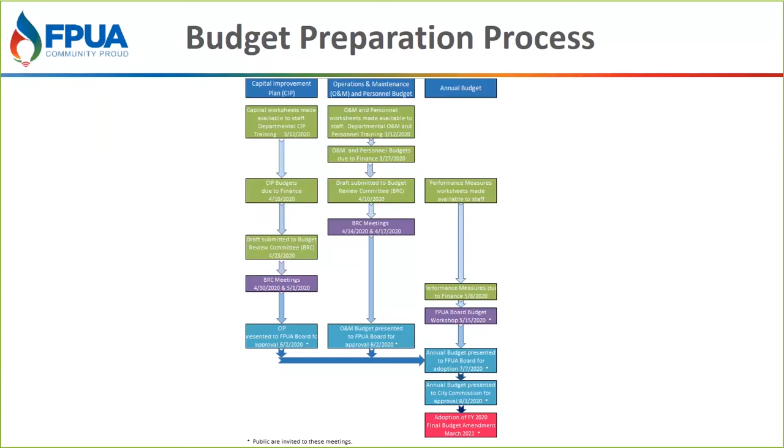Today, we are having our virtual workshop to explain what staff has put together in their budgets for the next fiscal year. After today's meeting, we will make some necessary changes, and we will present the individual O&M and capital improvement plans to the board.

What is being presented today is, as Mr. Tompak said, a draft. We are looking for your input so that we can make the required changes prior to presenting the final version for the board for approval.

As Mr. Tompak said, the O&M budgets are relatively flat, up just about 0.8% in the categories of salaries, employee insurance, and some other categories of professional fees, offset again by the purchases for resale.

The rate-funded budgets exclude any non-cash expense items: depreciation, amortization, and accretion, and the contingency is not included here.

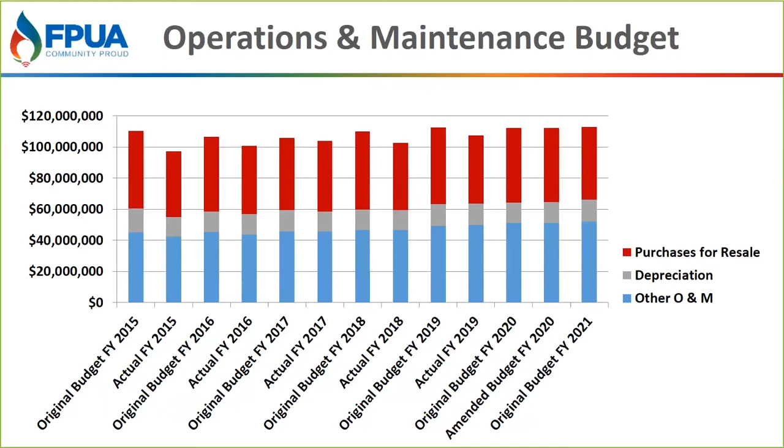This is all that I have to present on the overall look at the budget.

First off, water distribution. This project is for main services and valve replacements, budgeted at $556,000. This is the code used to handle any main breaks and other emergencies. Asphalt usually eats up a pretty good amount of that money as well, and if we have to call in the unit price contractor, this would be the funding source for that as well.

So if you look at the pictures I'm showing here, this is a break that happened a few months back on Delaware Avenue. We were lucky enough, if you can call a main break lucky, that this was underneath the sidewalk and not underneath the asphalt. So the overall cost for this repair was around $17,000. If it had been under the asphalt, it would have been at least twice that much.

Also in this picture, you can see the cast iron pipe and its condition. I really wish I could say this was an isolated area and that there wasn't miles and miles of this old cast iron pipe in our system, but that's simply not the fact. Most of the old parts of our system are this cast iron pipe.

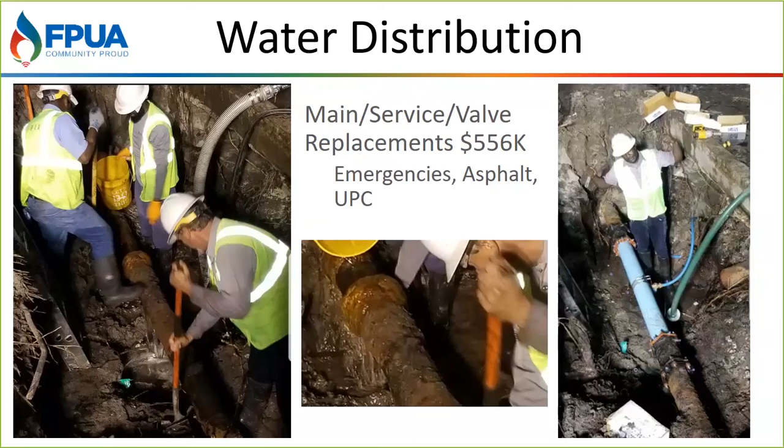Just to give you some statistics, the Water Distribution Department responded to over 135 different breaks this last year. Now that's not all big, massive breaks in the road. A lot of times it's a service saddle or service line that fails, and it may only be a few thousand dollars to repair that. But then there are others, such as the big break we had over on Georgia Avenue last year that cost well over $50,000 to repair.

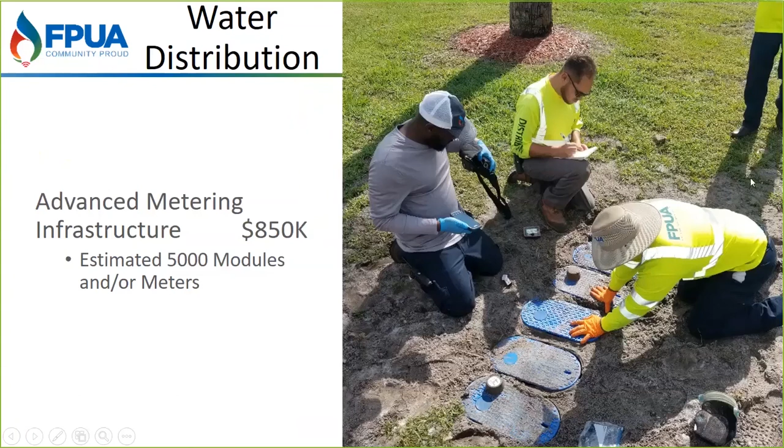Another big ticket item we have in the Water Distribution Department is the deployment of AMI at $850,000. We are estimating an installation of about 5,000 modules this next year. It's a very aggressive schedule. And in conjunction with that, when the guys are out there installing them, if the water meters are close to the end of their useful life, they'll go ahead and change those out at the same time as well.

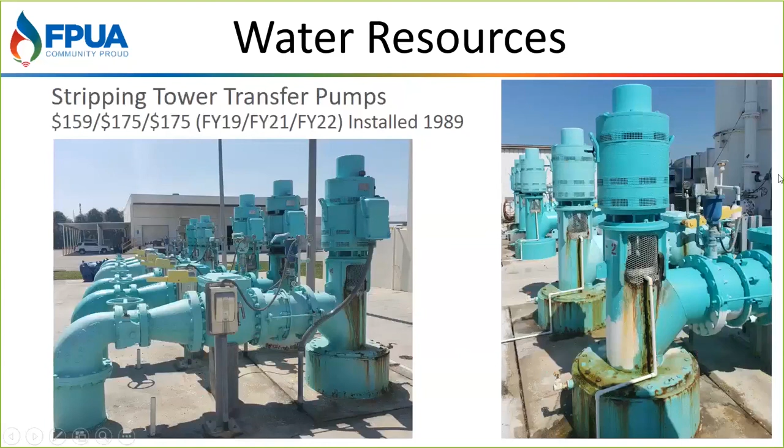Moving on to the stripping tower transfer pumps. There are 6 of these that were installed in 1989. 2 of them were replaced back last fiscal year. This fiscal year there were none scheduled, but going forward for the next 2 fiscal years, we are planning on changing the last 4 out, 2 per year at $175,000 per.

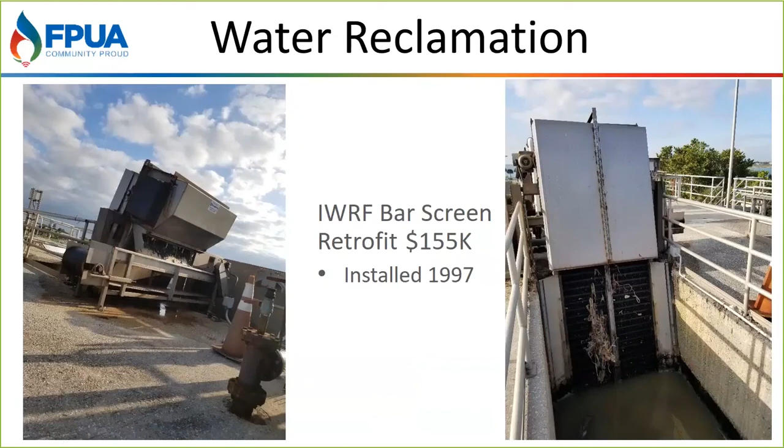Moving over to wastewater, this is the IWRF bar screen retrofit at $155,000. This particular machine was installed in 1997. This is our first line of defense for the wastewater plant. Without this particular piece of equipment, pretty much everything downstream would be fouled, and we would have some serious problems. You'd be very surprised at some of the items that this little machine gets out of the wastewater system. That's pretty much all I'll say about that.

Similar to the water distribution department, this project, mains, laterals, and R&R, is budgeted at $375,000 for the wastewater collection department. And again, this handles all the emergencies. Again, a lot of asphalt. A lot of funds are spent on asphalt for this particular code.

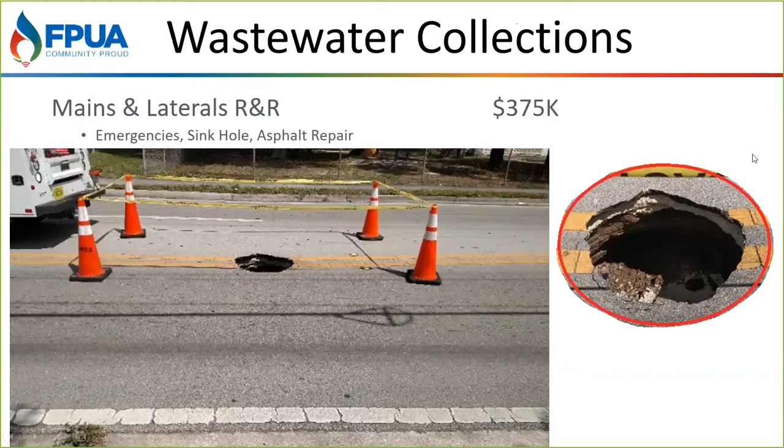The sinkhole you're looking at here is only about a foot, maybe 1.5 feet in diameter. It's obviously a much larger void underneath the asphalt before this actually pops up. Again, this is a relatively small one, but this one costs somewhere around $15,000. Sometimes these will be so big they could swallow a car, and $50,000 to fix a sinkhole is not uncommon. A sinkhole that pops up like this is something that the operations crews have to react to, and they usually deal with somewhere around a dozen of the reactive ones per year, as well as the other ones they're able to be a little more proactive with.

However, that makes water quality grants available to us. This year we have applied for a state water quality assistance grant to line the lowest part of our wastewater system, which would be the remainder of the pipelines over on South Beach. We are requesting $813,000 for that grant with an $813,000 match. We are keeping our fingers crossed for that.

All right, moving on to water and wastewater engineering. This is our customer base expansion program. This is budgeted at $525,000 for water and $200,000 for wastewater. There are 2 small neighborhoods that we're targeting this year.

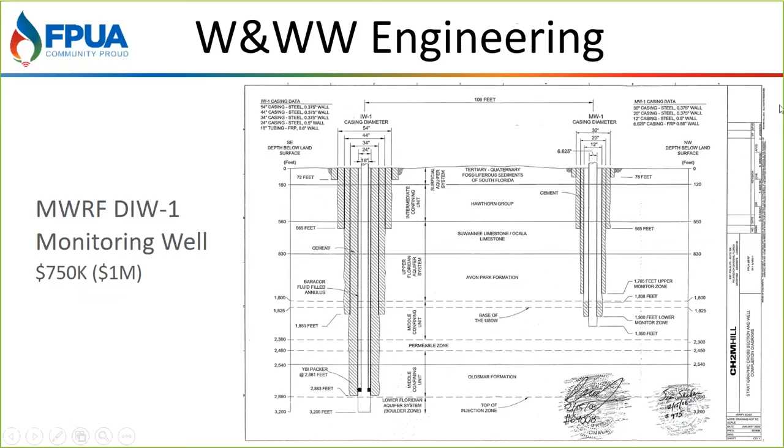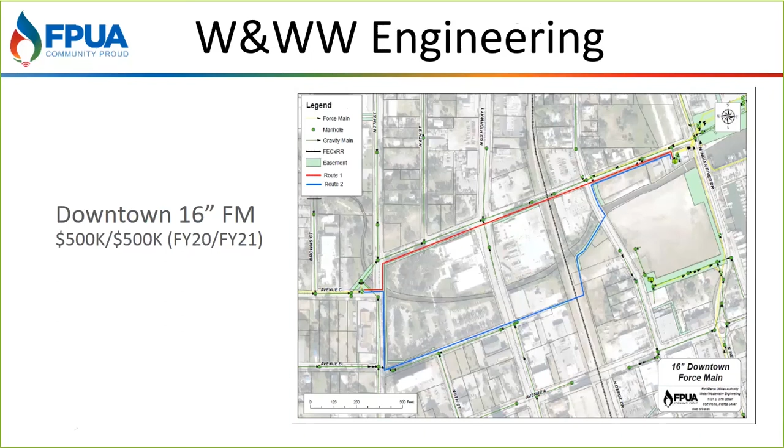And that is the end of my presentation. If there are any questions, I'll be happy to answer them.

Any board member have a question? Mr. Chairman, this is Linda Hudson. I have a couple of questions. It's on the customer base expansion of the 2 different neighborhoods. Is there an approximate cost for what it's going to be for the customer?

Well, the infrastructure in the streets, that will be funded by FPUA. That's part of our business model, and the business model is based on a 10% per year connection rate, which is the lowest connection rate we have ever seen, with examples such as a looping project where there was no advertising, no incentives, nothing of that nature. Even at a 10% connection rate per year, it's a good rate of return for us. So it's a good business decision for us to fund this ourselves.

From there, you have your typical costs for the meter and the installation, initiation of service. I think all of that together is somewhere around $900 on the water side, plus or minus. I don't have that number right in front of me. The wastewater side is a bit more expensive because you would have to install the grinder pump. You could have up to $9,000 as a pretty good estimate of what that would cost each one of the customers. That sounds like a tremendous amount, but it's right in line with installing a new septic system.

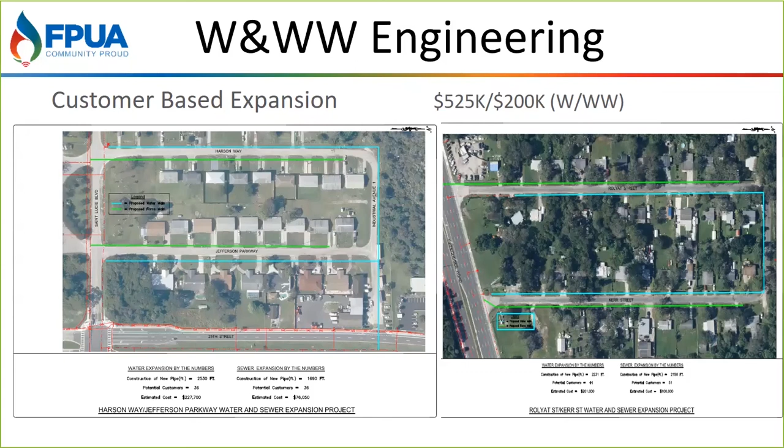A follow-up question on Lawnwood: I understand from the city side that Lawnwood told the city they're postponing their expansion until 2021, but are you still going ahead with this preparation? Yes, ma'am, absolutely. Our engineering group is working with them currently on sizing their on-site utilities, and we are moving forward as soon as this project is funded with starting the design on Frist Boulevard.

My last question is the MWRF, is that physically located out at the property where the ESC is? No, ma'am, that is on the same property as the TCEC, the Treasure Coast Energy Center. That's on the property we pre-purchased years ago for the new mainland water reclamation facility. All right, that's all my questions. Thank you.

Thank you. Any other board member? I have a couple concerns, let me address a few of them in line as I've written them.

The first one is all the cast iron, how much more cast iron pipe do we have in the ground? Yeah, we have a lot. Mr. Matthews, I can tell you all the old parts of the city are all cast iron. It is everywhere.

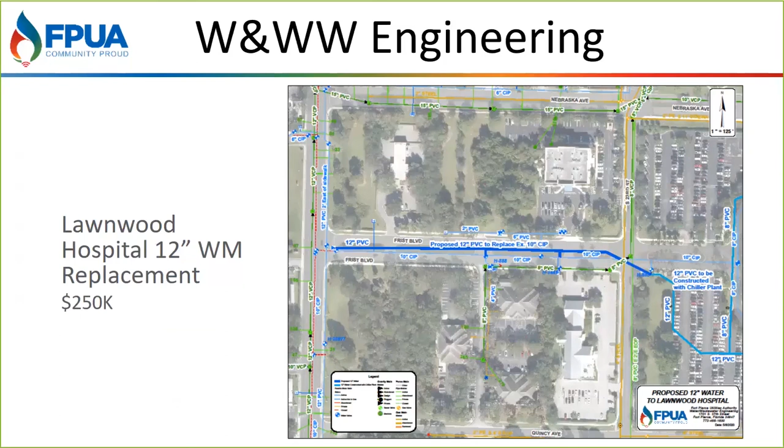Do we ever look at exploring grant assistance for projects like that? Yes, sir. I can tell you the lining project I showed you earlier, we're asking for assistance on that. There are very few grants for water. The grants are more tailored to protecting the environment on the wastewater side. The water grants themselves are very few and far between.

Neighborhoods that we hear about, but we don't necessarily say it's a problem here—I'm giving you an example, Orange Blossom Estates, looped around the stadium back in there. Do we have any major problems in that area? I would have to look back at our R&R priority list to tell you, but that is an older neighborhood, so the simple answer to your question is yes.

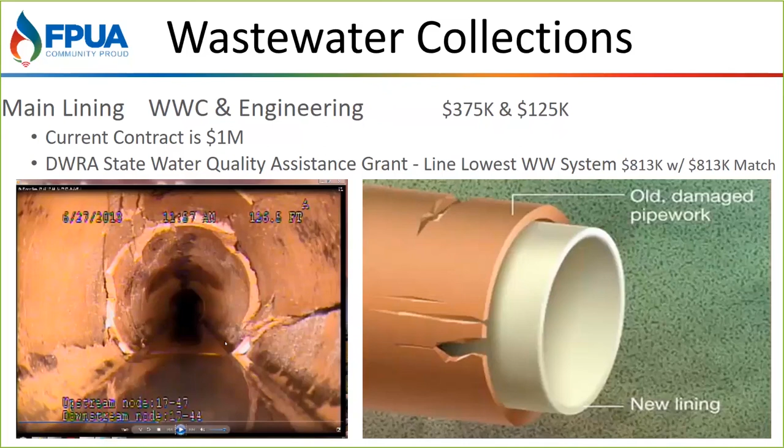Okay, all right. Mr. Tompeck, would you move us to the next project? Yes, thank you. Next presentation is by Paul Jakubczak on the electric and gas capital project overview.

Thank you, Mr. Tompeck, Mr. Chairman, members of the board. I'm happy to present some of the major capital projects we have for the gas and electric departments. The biggest thing we have on gas is how do we expand our 4,500 customer base to bring in more customers, but also bring in more revenue, which in turn will decrease costs to all customers as we move forward.

So we've identified three areas that we would like to expand to: Lakewood Park, Indian River Estates, and Harbor Branch. Lakewood Park is a large project to get out to. The estimated costs are about $14 million. There are 8,500 customers out there. We estimate that if we had a 40% take rate on all of those customers, we're looking at about a 17-year payback. So as you can see, it's more of an economics issue to get out to Lakewood Park. We will be continuing to look at ways to get out there.

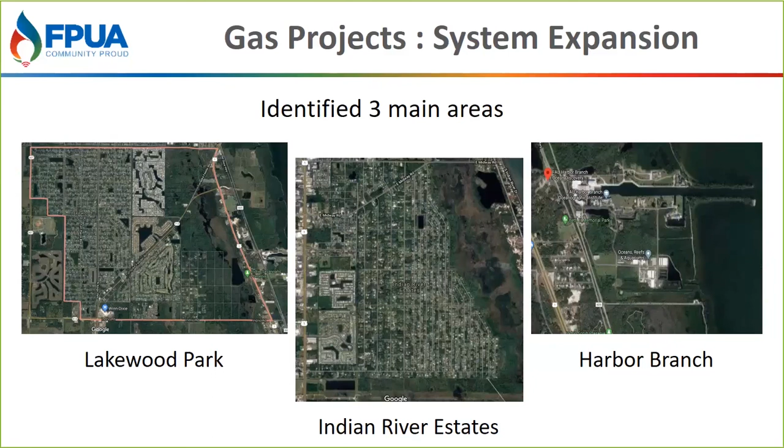Some of the challenges that we have, of course, is customer take rate. One of the things people don't really understand is the benefits of gas, and that's where we get into educating on the benefits. It's a clean-burning solution, especially for cooking and heating water. The other option it gives people is during hurricanes, if your power is out, you still have a way to cook and take warm showers. But the infrastructure costs are sometimes counterproductive to actually moving forward with that. We estimate the average cost for a customer with a gas water heater is around $25 to $35 per month. If you compare that to an electric water heater, you're probably looking at saving $20 to $30 a month just on water heating.

Some of the opportunities we're looking at to continue our expansion projects: installing in the right-of-ways, upsizing pipe as we go through. One of the projects we're working on right now is Kings Highway. As we move up, if we continue with this Harbor Branch project, it gets us closer to Lakewood Park and going down Indrio Road. The other thing we're going to investigate is joint trenching with the county and also with electric projects. The county is actually working on a project in Lakewood Park right now, possibly doing some drainage, maybe new sewer and water projects. We're going to look at getting into joint trenching with them.

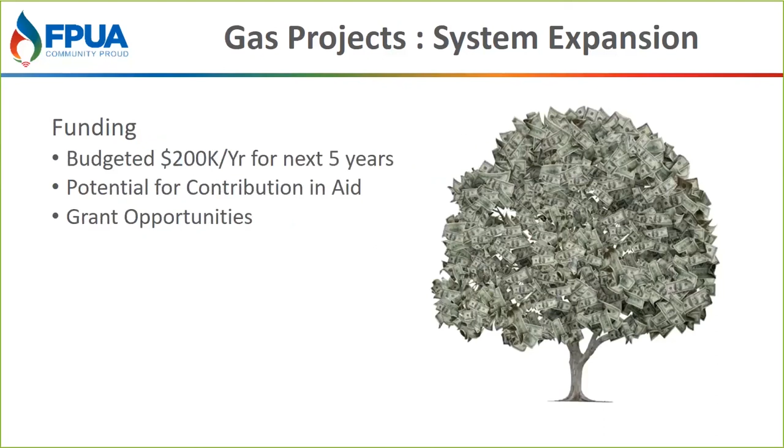Moving over to the electric side, we're going to talk a little bit about our transformer and 69 kV breaker projects. If you remember, a couple of years ago we approved our 2019 storm hardening and grid modernization plan. In that, we talked about changing 12 of the 69 kV oil-filled breakers in our system with what they call an SF6 vacuum bottle type installation. Right now, we're currently budgeting $180,000 per year for the next 4 years. We have already installed 3 of these switches this fiscal year, 2 at Causeway, 1 at Savannah. These are all going to be funded by rates and will improve the reliability of our electric grid.

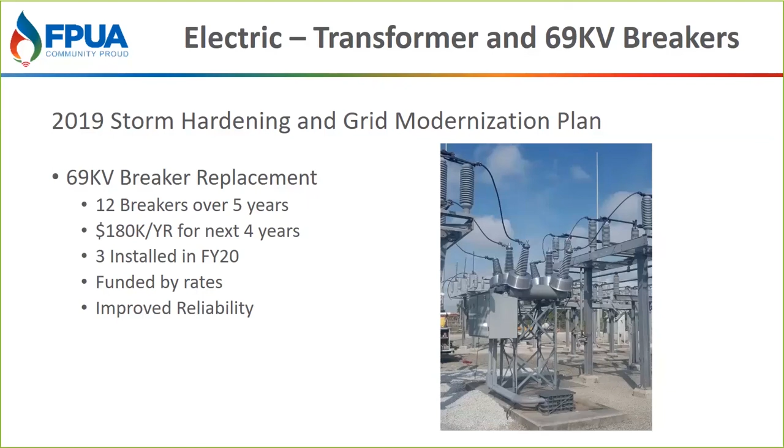Next slide. The second portion of our 2019 storm hardening and modernization plan I want to talk about is our 69 kV to 13.2 kV substation transformer replacements. As you remember, because of the cost of these, which is about $600,000 per unit installed, we're only budgeting to install 1 per year over the next 6 years. Right now, we're scheduling the first delivery of the transformer at Savannah in November with an immediate start of installation. All this is going to be funded by rates and will improve the reliability. Currently, the drawings for that Savannah transformer are 90% complete, and once they are 100% complete, they will start production of this unit to get it delivered to us by November.

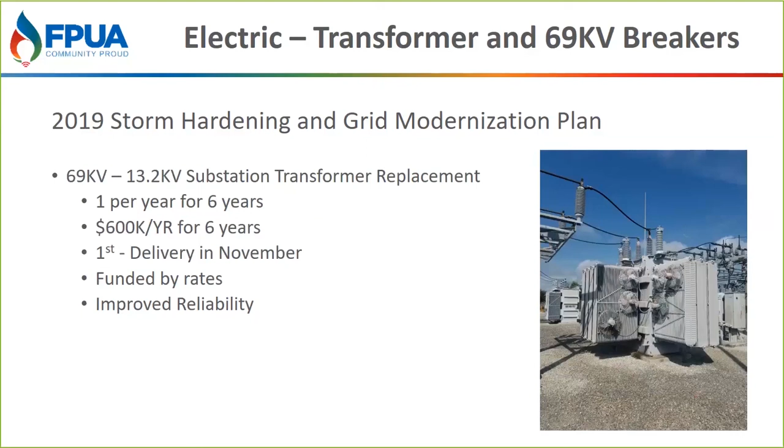The next project we want to talk about is our pole replacement project. Currently, we have 587 poles on the books scheduled to be replaced. Part of our requirement is that we test 20% of our system per year to make sure we're staying with the PSC and NESC requirements for pole integrity, to make sure they don't just fall down.

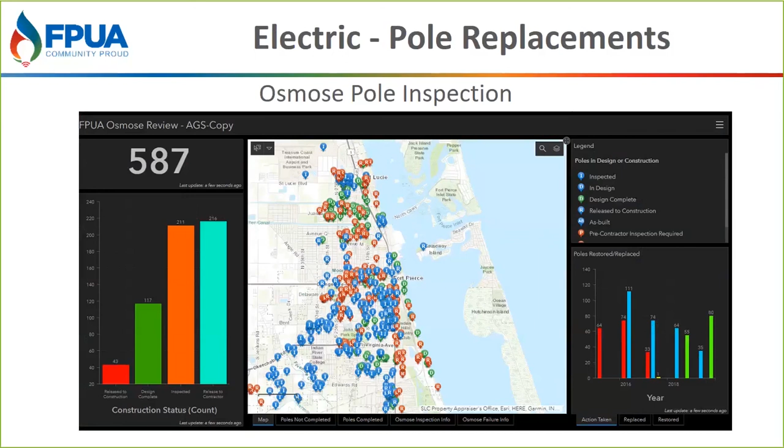Next slide. So what are we doing? We budget $350,000 per year, and we're going to do that for the next 5 years. We figure we'll be able to complete this 587 pole backlog that we have. Currently, we see roughly 100 or so poles added to this list per year, but we're seeing our numbers go down as we continually replace them.

As I mentioned, this is a PSC requirement that we go through and test and change out these poles. We also follow all the latest NESC guidelines for replacement. This is also part of our reliability improvements.

Recently, in the past 3 years, we've contracted out to help us replace these poles. The first year, we had a contract to replace 45 poles. The second year, we replaced a little over 100. And this year, we're finishing up and should be done within the next 2 to 3 weeks, with a total of 224 poles replaced by a contractor.

Now, this does not mean our crews are not replacing poles as well. It just supplements our crews, making sure they can do other things and helps us catch up on that list. Right now, we're looking at probably contracting over the next 2 years to keep up with our pole list, and this is all funded through rates.

Next slide. And of course, the last project I want to talk about is our AMI project. We'll go through the next 2 slides briefly, as most of you have already seen this.

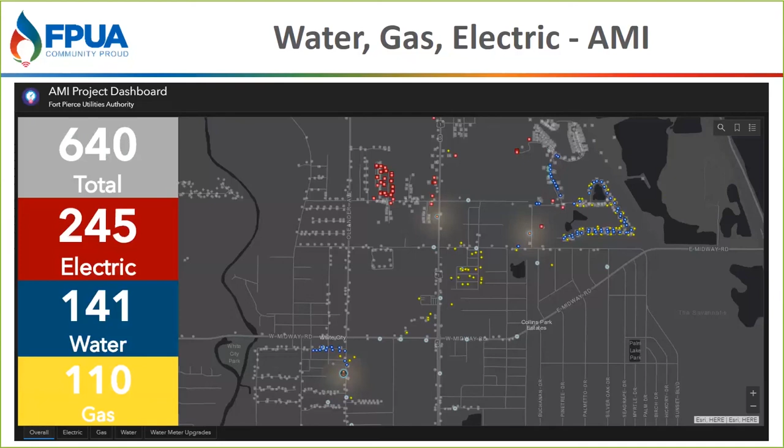Currently, the objective is to change meters if you draw a line from the north side of Gator Trace going south, picking up all those meters, as well as those from Repump 2 going south to the county line on the beach. That is what we're calling our pilot area, and that's where we're concentrating all of our meters.

This next slide shows the utility portal of where the meters have been installed on the electric side. We're still working to make sure our communication infrastructure is in place to read all modules and meters and get them into the billing system. Right now, we're still looking at a June timeframe to do some training on the utility portal and the consumer portal, as we continue changing out meters and working towards a hardened communication infrastructure.

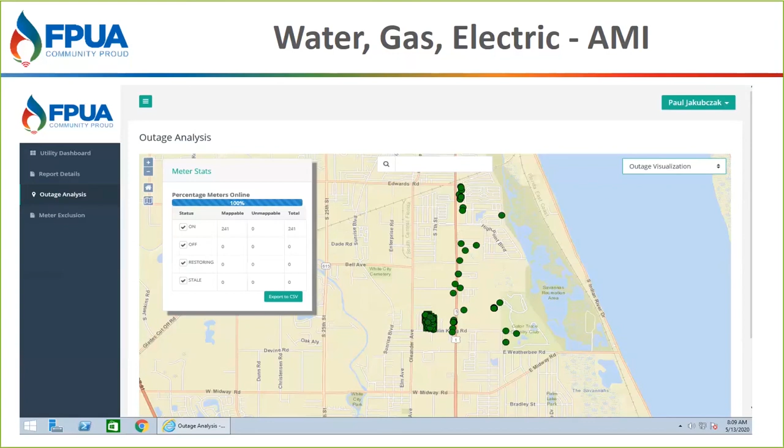So with that being said, our advanced deployment, we're planning on being completed by the end of July of 2020, with testing and final approval for the advanced deployment area by September of this year to fit it into a fiscal year 20 budget. Once we get all the approvals, we'll move to full deployment, as Mr. Hutchinson mentioned earlier. So the next steps, we're looking at a 5-year deployment. We may accelerate that depending on funding and resources available to change out these meters and modules. As you can see, we've got 27,000 more electric meters, 20,000 more water modules, 4,400 more gas modules, and of course all the communication infrastructure required.

We're also anticipating the release of the consumer portal, where customers will be able to see their usage and their bills sometime in August of this year.

So how are we going to pay for this? Currently we still have about $1.6 million left over from the FPL line sale that happened back in 2018-2019. Electric has budgeted $500,000 a year for the next 5 years. Gas has budgeted $136,000 a year for the next 3 years, and water has budgeted $850,000 a year for the next 4 years, which also includes their meter changeouts as needed.

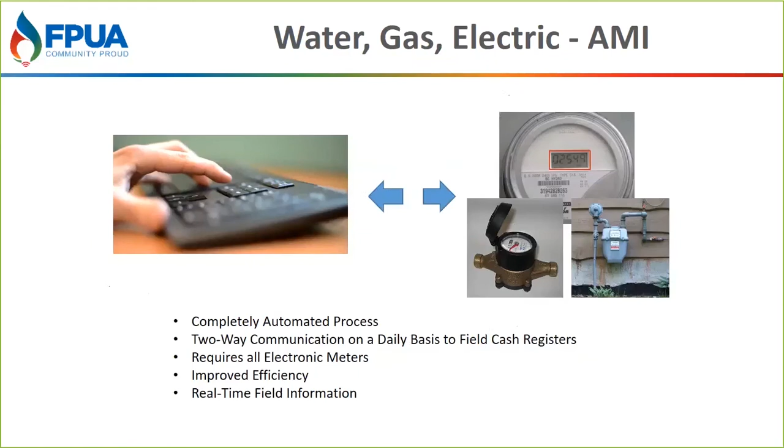Any new customer, any meter that you got 29,000 or 27,000, you might end up with more. It depends on what areas are to be built or improved. We have started on the electric side, and the water gas side is a little different because they're just replacing modules. But any meter installed on our system on the electric side is an AMI compatible meter. It may not be reporting back to the head-end equipment electronically yet, but any meter we install on the electric side will have these new modules or new meters installed, which will communicate once we get that communication infrastructure up to them. So for instance, over the past year, we have been changing out meters with AMI type meters.

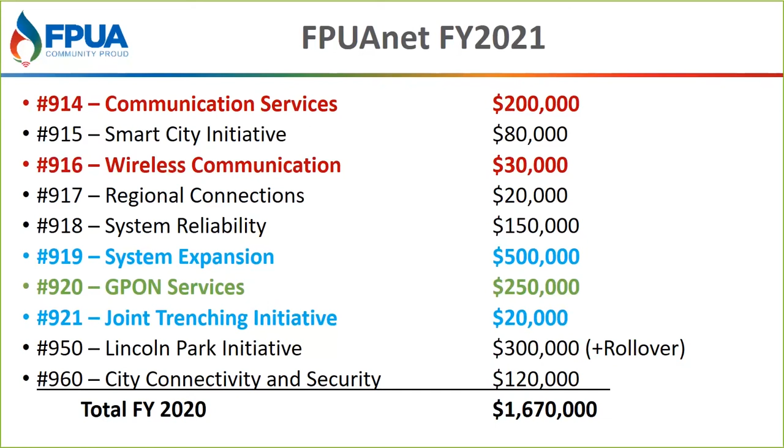Highlighted in green, project 920 is a project that the board has seen before, but in combination with projects 919 and 921, highlighted in blue, which are new to the FY 2021 budget, all of these projects introduce a new paradigm shift. Instead of waiting for the customer, we're preparing to build our system to accommodate every parcel as we expand, replace, and repair our system.

So digging a little deeper, I'd like to highlight the top 5 projects. Project 918 is an extremely important project because as we replace end-of-life components such as cable, we will proactively replace, for example, an existing 48-count cable with maybe a 96-count cable at a fraction of the cost with a plan to expand. Again, highlighted in blue, these projects will introduce a paradigm shift to help grow our system.

Project 919 will use more rate-funded money to grow our system. We will still require contribution in aid of construction, but we will now be focusing on building our system instead of just constructing a service. This approach has worked really well for the water wastewater system over the last few decades.

Project 921 is a great opportunity to work closely with our internal resources when water, wastewater, gas, or electric are rebuilding, relocating, or expanding. We will install a spare conduit in the same trench or a trench next to it at a fraction of the cost. This empty conduit will allow us to install fiber with very little construction, thus reducing the overall cost today and in the future.

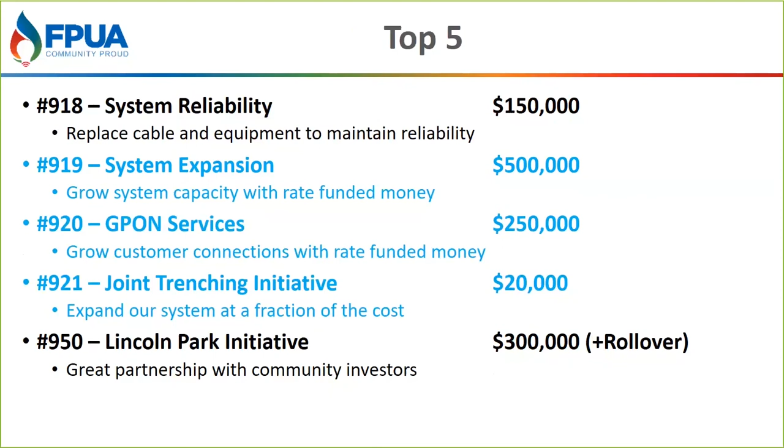As I mentioned earlier, we did receive our high-level design from our consultant for Lincoln Park on Monday, so I'd like to bring back Jason Miller at a later date to provide an in-depth review of this project and its timeline.

So you may be asking, how do we measure our success from our investments? Today, I'd like to use population growth. From 1911 to 1940, the city of Fort Pierce had an average yearly growth rate of around 7.7%. During that time frame, Fort Pierce built a power plant and a water system. These were essential services in 1911, and of course they still are today.

We continue to have success from the 1940s to the 1980s with an 8% growth rate, but between 1980 and 2018, we had a 1% average growth rate. Through this time frame, we did have 2 recessions, but we also had some great periods of economic boom.

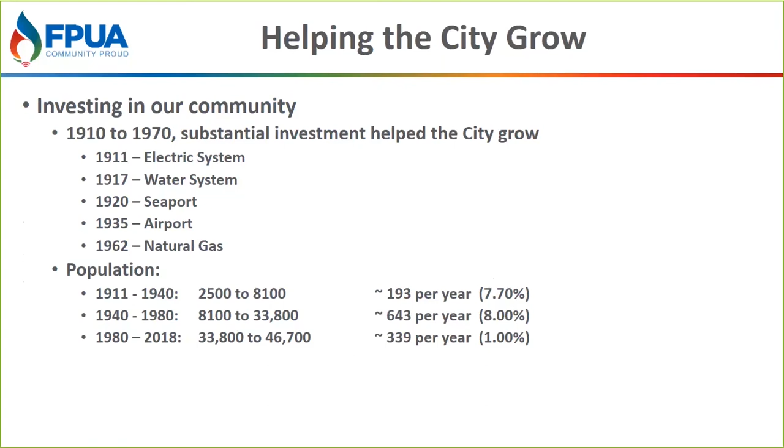So looking forward, how can FPUA help the city grow? I believe that in today's world, internet service is no longer a luxury, but an essential service for all of our customers. FPUA is in a prime position because we have over 110 miles of existing fiber backbone already in place, and a majority has been there for nearly 20 years.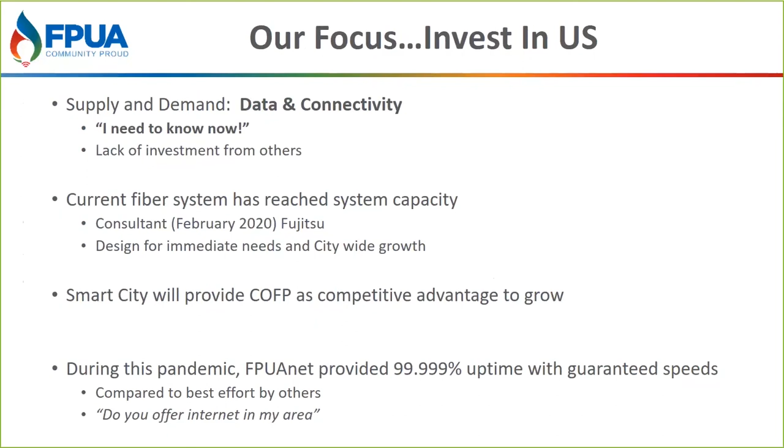So how do we get there? We need to invest in ourselves. The FY 2020 budget provides an aggressive approach to expand the current system while incorporating new architecture to allow for more customer connections.

An example of this new architecture can utilize one existing fiber strand to connect up to 32 customers. In the next 5 to 10 years, the technology will obviously change, and we could have the ability to connect up to 64 customers or even up to 128 with that same existing fiber strand.

So I'd like to circle back to 1911 for just a second. FP&L was not ready to invest in Fort Pierce, so we built a power plant out of necessity. 9 years later, by the 1920s, only 35% of homes in Fort Pierce had electricity, approximately. Today, electricity is in every home, but fiber is not.

So I believe that we find ourselves in the same position. We need to build our fiber utility out of necessity because it will be a long time before others invest in our city.

A couple of challenges that we face: construction timeline and the skilled workforce are hard to overcome.

But I truly believe that today, with the groups that we have working together internally — the Electric and Gas Engineering Group led by Mr. Lammers, the Information Technology Services Group led by Mr. Fryer, the FPUAnet Group led by Mr. Mittler, and obviously with the support of Mr. Tompeck and the board — I think we have the best team in place to make great strides over the next 6 to 12 months, and more importantly, over the next 10 to 20 years. So I'd be happy to answer any questions that you may have.